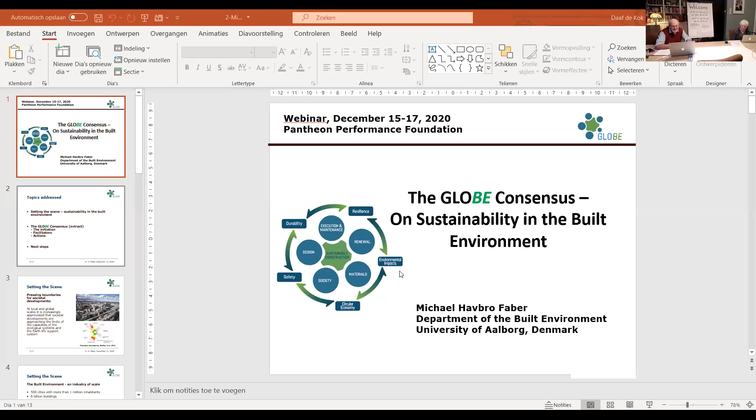Yes, thank you very much, Jacqueline. Sorry for not being able to find the link in due time, but here I am, ladies and gentlemen. I'm very happy to have a little time here to present the globe consensus on sustainability in the built environment.

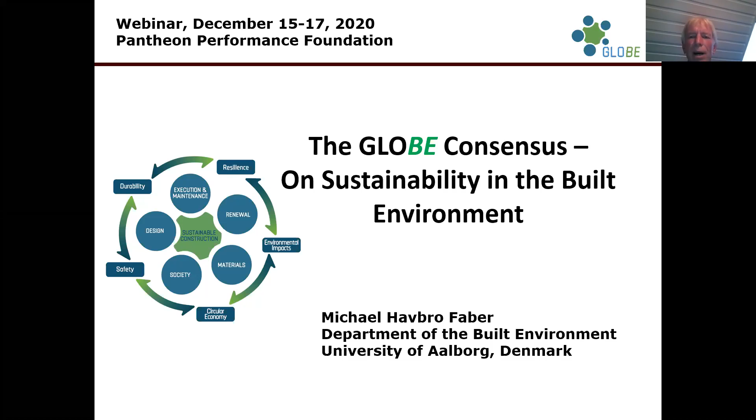So I only have a few minutes, so I will set the scene very briefly. You all know it basically, but then I will describe how the globe consensus initiated, and more or less, but not in great detail, what it contains, but also point at possibilities, things we can go after jointly, and I will point to next steps.

As you all are very well aware, but I think people outside our spheres may not be so clear about, is that the built environment actually poses a very significant challenge with respect to sustainable development. And of course, as professionals in this domain, we need to make sure we take the right actions.

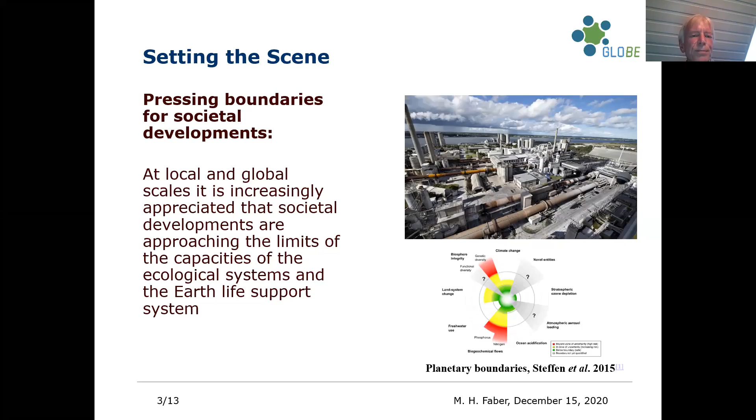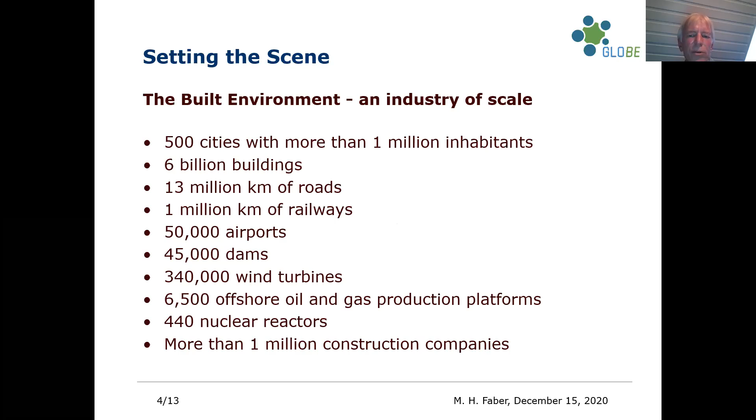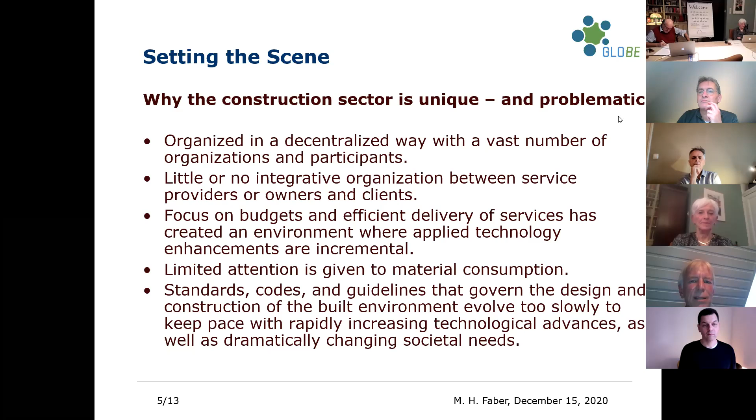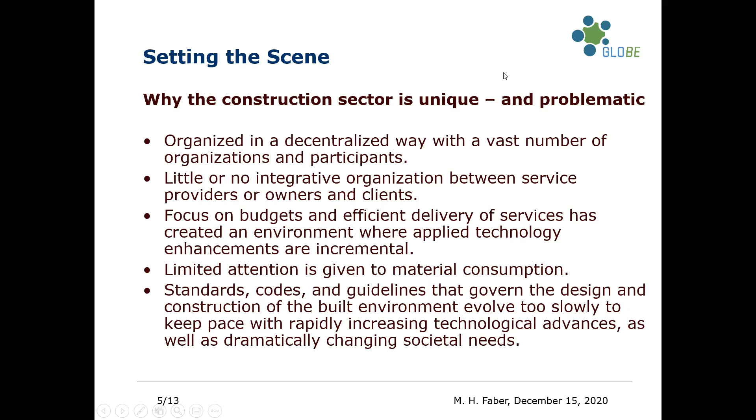Because the construction sector, with all these actors - more than 1 million contractors alone - is problematic. And it's problematic because it's organized in a decentralized manner. There are no integrative organizations between service providers, owners, and clients. And as we all know, there has been a long time focus on budgets and efficiency rather than real quality the way we understand it. There has also been very limited attention to use of material. And as we all know, standard codes and guidelines are moving slow relative to the rapidly increasing technological advances.

One very bold statement: if we were to be stuck with present best practice technology, the way we have been doing things up till now, then sustainable development would actually necessitate that we really consider building as little as possible.

And that was the starting point for a workshop we had at Tongji University in 2019 between the Joint Committee on Structural Safety and the International Joint Research Center for Engineering Reliability and Stochastic Mechanics. At that event, we developed a consensus document relating to sustainability in the built environment.

This consensus document was brought back to the liaison committee, which organizes joint matters of interest between RILEM, IABSE, FIB, CIB, ECCS, and IASS. The joint committee was given the mandate to try to establish a consensus between these associations, and for that purpose, a special task force was established, and a number of meetings were held. In 2020, in the summer, the consensus was reached, and by October the GLOBE consensus, as it is now called, emerged and was released.

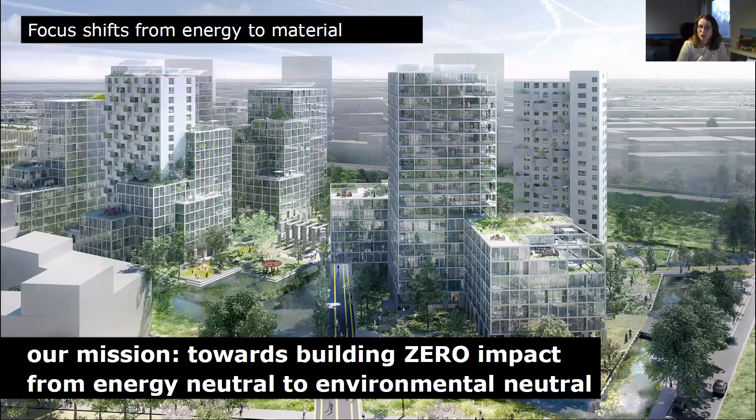What we see in our projects is a shifted focus from energy to materials. If we want to build buildings with zero impact, this is very important. We need not only our buildings to be energy neutral, but also environmental neutral.

And the structure is very important in this, because the material use of the structure is about 50 to 60% of the material use in all buildings. So you can see that the influence of a structural engineer is quite big in this.

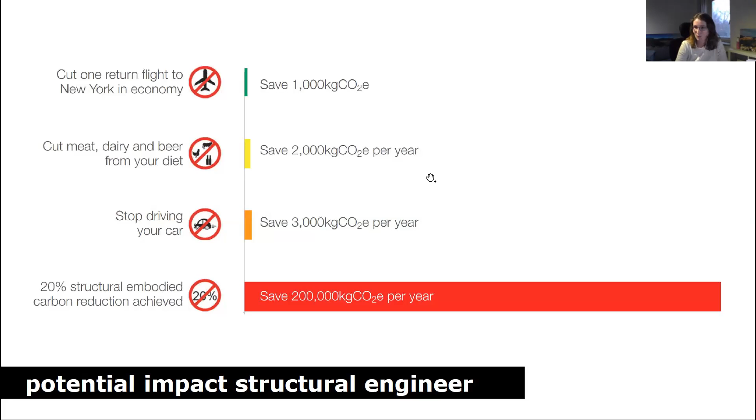If all structural engineers would reduce their carbon footprint in their structures by 20%, you can see what a big influence that would be. If compared to stop driving their car or cut meat from the diet, it has a much bigger impact.

I want to focus now on what we can do to reduce. Like Jacqueline told about the R ladder, if we look at the reduce of materials, the type of materials, we can reduce our carbon footprint or environmental price. And it's important to monitor and control all materials we use during the design process.

We can do this by design optimization. This is an example with a windmill foundation in which we did advanced calculations. There we were able to not only reduce the size of the foundation element, but also reinforcement needed in the element. And this made a reduction of carbon footprint of more than 30%.

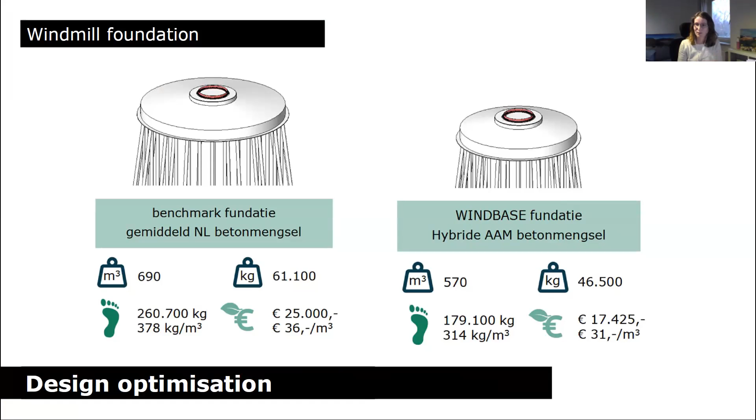So first we did the calculations to reduce the carbon footprint, but then we also looked at the concrete mixture. I'll talk a little bit more about that later.

Another project in which we did design optimization is the National Military Museum, in which we were able to reduce the steel structure of the roof by 40%. And we also had to use advanced calculations for this, because there were a lot of design stages, a lot of different calculations that had to be done, so it couldn't be done by hand. And also by optimizing this, we could really optimize the steel structure, so also having a huge impact on the environmental impact of this project.

What we also do is we try to look at our projects live. What's the environmental impact? So we developed a plugin for our 3D models with the environmental database to live see in our models what is the environmental impact. And by doing this, we can use this in the design stage to make decisions.

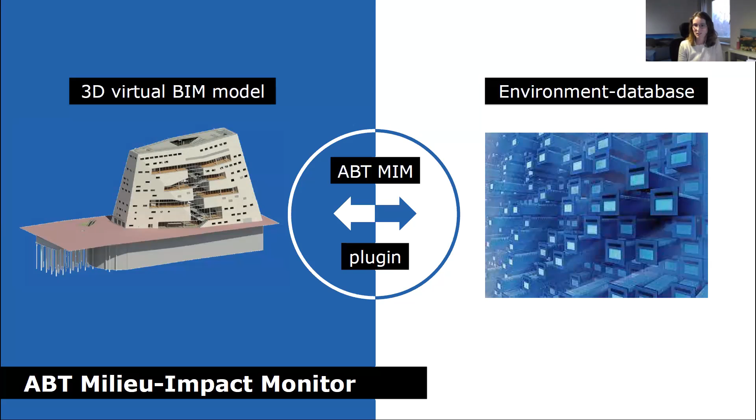We made a study of columns, for instance. We looked at a lot of different columns with the same principles, and then looked at which columns have the least environmental impact. What you see for concrete columns is the optimum between the concrete strength, the reinforcement you use, and the size of the column. So it's really important to look at all these things when you try to minimize your environmental impact.

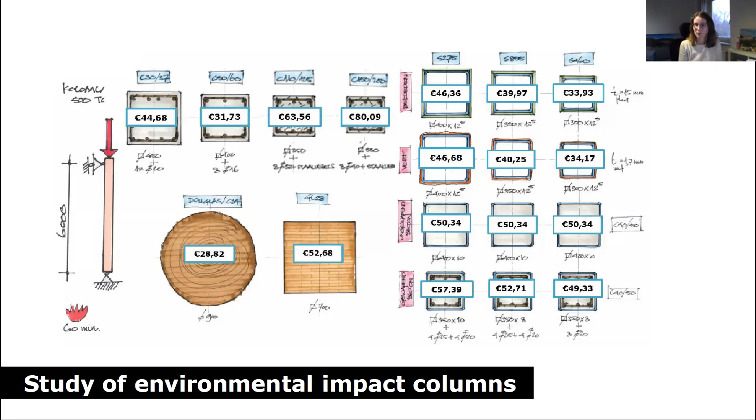Next, please. We not only look at elements, we also look at whole buildings. This is an example of a new residential building in Amsterdam. Here we looked at the carbon footprint of the concrete mixture.

So we prescribed a green concrete mixture, and by doing this we could reduce about 1 million kilograms of CO2. You can compare this to driving around the world about 150 times by car. So you can see, only in this building, by prescribing a green concrete mixture, what you already can do, what you can gain.

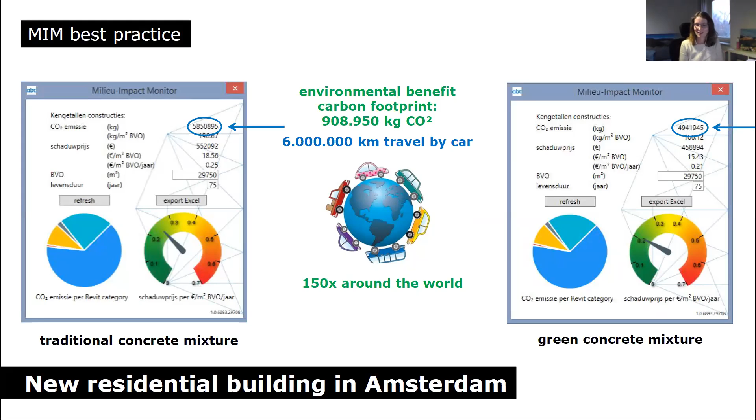If you look at these concrete mixtures, it's very important that you collaborate, because not only the structural engineer can do this - you have to discuss it with the contractor, with the concrete technologist, and come to a design that is optimum. Because if you choose a green concrete mixture, the starting strength can be different, can be lower. So you have to take this into account in the design stage.

I've given you some examples of what you can do in the design stage. I hope you're a bit inspired to really start with this at the beginning of the design stage, because there are a lot of possibilities. There's a lot to gain. Thank you for your attention.

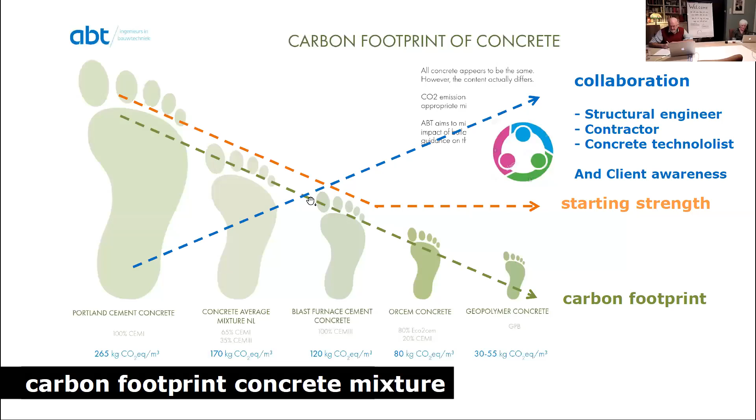Probably - Evelien, I don't know if Evelien is still there. Yeah, sorry, no, but Kathleen. Yeah, that's because I thought the question wasn't for me. No, okay, no, sorry, then I continue and go to Thomas Romm.

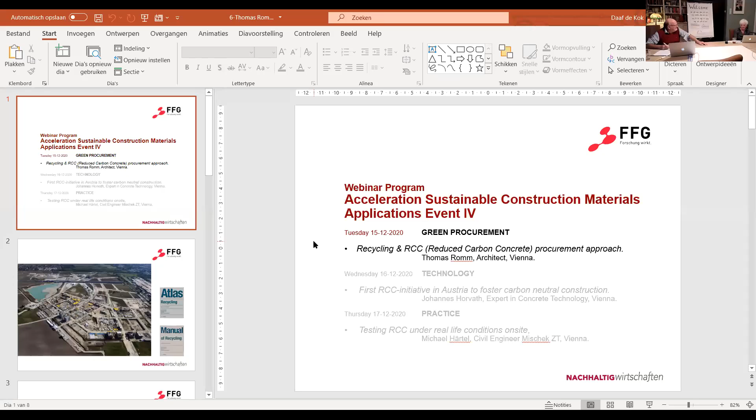He is an architect living in Vienna, and I'm curious to know what he's going to tell about recycling and reduced carbon concrete procurement approaches. The floor is yours.

Hello, everybody. Thank you for the invitation. Our presentation will continue tomorrow and the day after. We are a small consortium and we're going to present our research on reduced carbon concrete. But first, I'd like to talk a little bit about our procurement approach.

Next slide, please. Our architectural practice in Vienna has strong expertise in the environmental impact of construction, and for about 15 years now we have been consulting for ÖkoKauf, Eco Buy Vienna, the green procurement program of the city of Vienna.

In 2005, the city council started a 3-year research project on construction logistics, and that led us to design resource strategies for the fast growth of Vienna. This culminated in 2015.

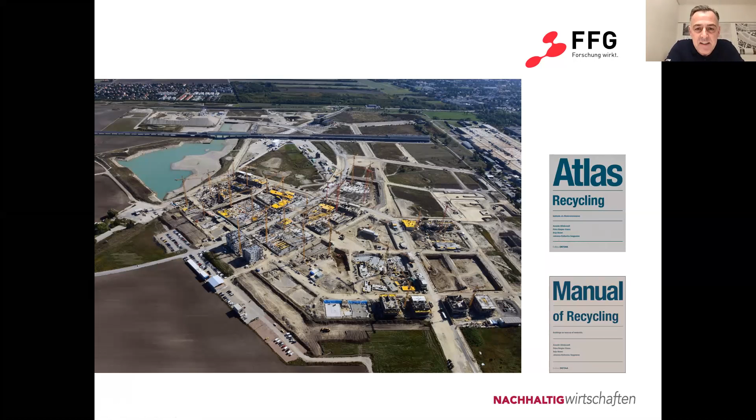This is what you see here on the image, when we were coordinating the initial phase of the Seestadt Aspern, a major city development area for 20,000 people, 20,000 inhabitants and 20,000 workplaces. So our work has been published, even in English, as you see, in the Manual of Recycling last year in 2019.

Next slide, please. Our strategy was a double input approach. First, we reduced the masses by optimizing a mass balance - by simply lifting up the street levels and using local material in order to reduce excavation. So this was the urbanistic approach.

But then in the first construction phase, which you see here on the left, of 3,000 housing units, we used, or reused, or recycled - you name it - 1.5 million tons of local material to build these first 3,000 housing units, just by procuring the logistics of it, for a bunch of 20 developers and 25 plots of construction, with a mobile concrete unit processing these local materials, coming on one hand from the little lake here, and on the other hand from the excavation material of the housing.

One more word: the result was that we could, in fact, have 100% locally produced concrete on site, with a double unit with a maximum capacity of 200 cubic meters per hour. This was the largest ever seen in Austria.

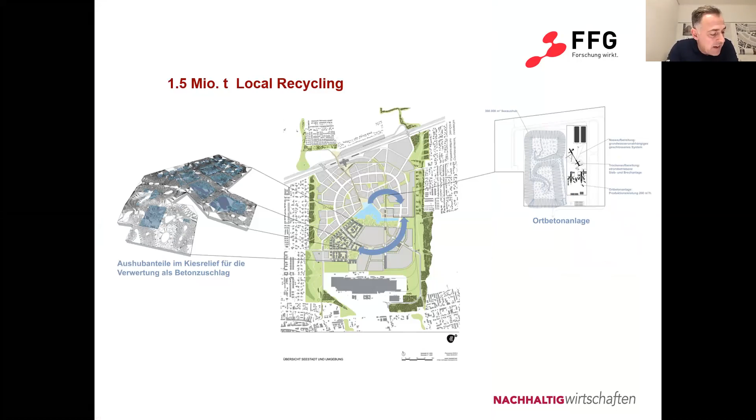And finally - next slide, please - we were asked in the following years to scale this down to single housing projects like high-rises, and worked this out. So it came to the point that we had an engagement for Nordbahnhof, which you see here on the right hand - another 3,000 housing units are going to be built between 2020 and 2022. In that case, we were asked from... can you see my cursor here?

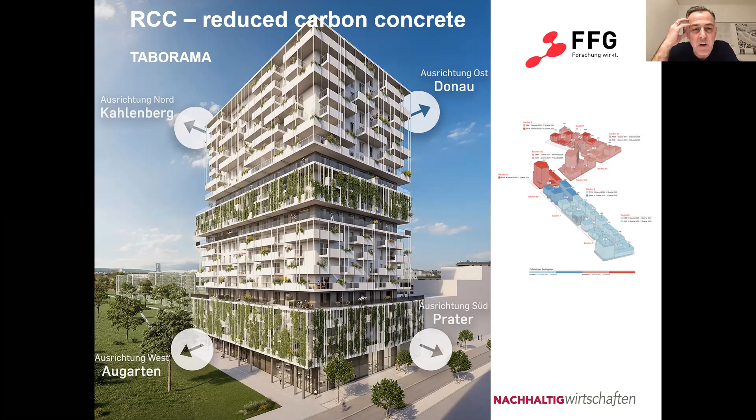This special high-rise is part of the whole development area, to have a look on reduced carbon concrete for Strabag, for this Strabag building. Strabag Real Estate asked us what we have learned from ICLEI and the Big Buyers initiative, as European context is approaching and proceeding in the question of reducing carbon in concrete. So we had a research program ongoing, starting in March this year.

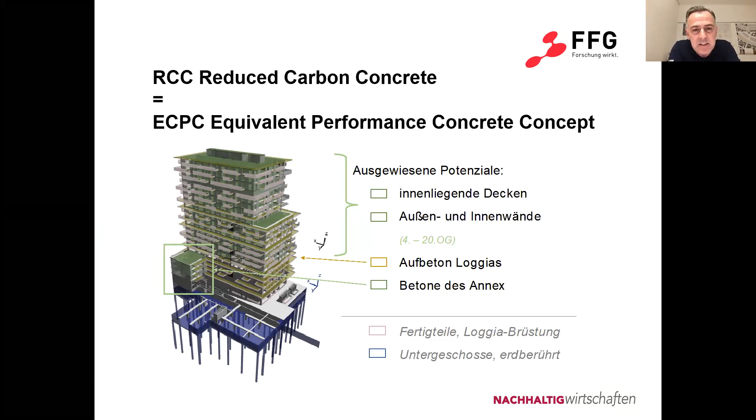We had a look at this special high-rise being part of this housing structure, and we looked at the elements in the BIM model. We identified possible elements to reduce carbon in concrete with the equivalent performance concrete concept, which I first learned from Boudewijn when I met him in Nijmegen at EcoProcura.

The result of this ongoing experience is our summer series on the construction site, where we are testing and doing a risk assessment and cost assessment of clinker-reduced concrete. So we have these usual fillers, such as blast furnace slag and fly ashes, to reduce the clinker content and therefore reduce carbon.

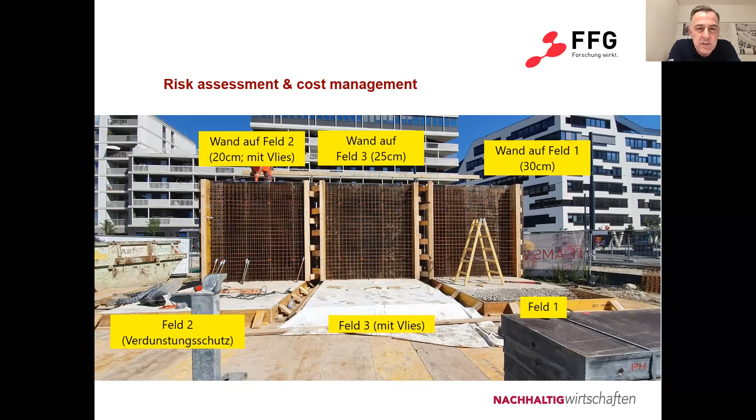These RCC concretes are very sensitive to low temperature, and this is why we have to continue these experiments now in wintertime, to compare and see if these results can be achieved within the existing standards.

This is the second experiment we are actually doing right now at Mischek Systembau, a prefabrication plant near Vienna. The conventional recipe, shown on the left, uses about 250 kilograms of clinker. Our recipe now, which is still not the final version, uses about 180 kilograms of clinker. So you can reduce 46 kilograms per cubic meter of concrete.

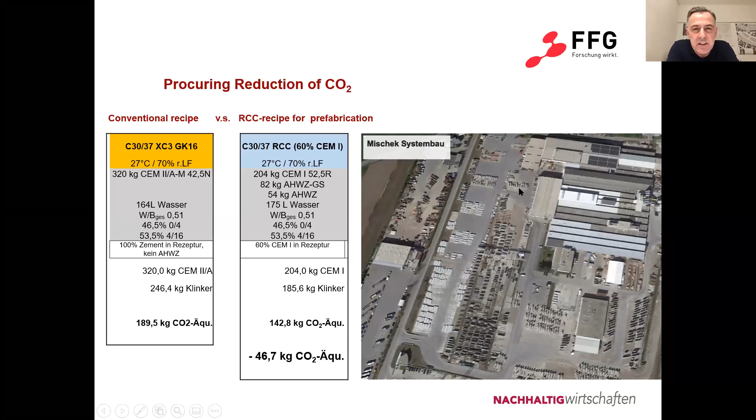So we are now procuring with EPDs, planning to compare these recipes with the conventional LCA EPD existing for any kind of concrete. Here, for an exposure class of C30/37, a conventional concrete produces 236 kilograms of CO2 per cubic meter in the production phase, phase A. With our reduction, within the normative approach of the equivalent concrete concept, we can reduce at least 20% for this case.

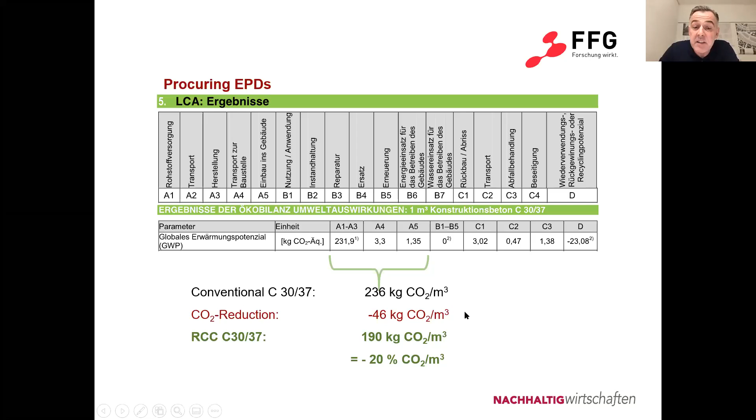Thank you. Wonderful to hear, Thomas.

We really like to share your experiences in putting all our innovations into practice in the Netherlands, because there are many similarities in the kind of activities that you are carrying out and that we are planning or already carrying out as well. So thank you so much.

I'll come back to you later, but I first want to give the floor to Martijn van Leeuwen of NIBE, who will talk about environmental shadow cost indicator tools for setting contracts.

Welcome, Martijn. Yeah, thank you, Jacqueline. Thank you, Boudewijn. Thank you for the opportunity to present some of our work that we've done in the Netherlands in the last 10 years.

I've made a very brief presentation for you. And I see my screen—you see it as well, I think. So, next slide please: the Netherlands.

There is something notable about our country: because of the significant industry we have and the limited area we have, living in a delta close to the North Sea with main rivers flowing through us, and having a big agricultural and chemical industry, we experience one of the strongest man-made pressures on the natural environment in the world. This has made our country very conscious of this issue. We are very aware that we have an influence on our national environment, and we have all kinds of policies and measures in place, including a focus on environmental performance for many years, and green public procurement based on LCA data for at least 10 years.

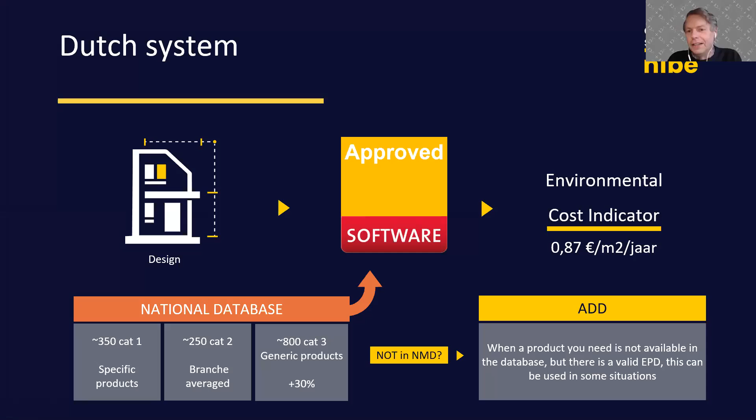So, next slide, the system. So we have a national method for LCA for constructions, and it is based on the European norm. We express it as a single point to get a total environmental cost indicator in euros.

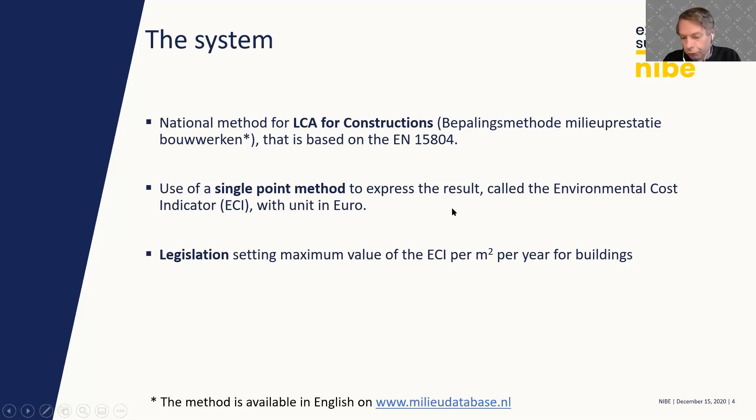And we have done 2 things. First, we have set legislation setting a maximum value of this environmental cost indicator per square meter per year for all types of buildings, mainly residential and office buildings at the moment, but the others will follow shortly, I think. So you will not get a permit if you are over this value. This is an important mechanism in our market, so that you need to show and prove that you build and construct under this value.

And we have done another thing: we use this environmental cost indicator in green public procurement as a criterion in the following way, so that we offer the contract to whoever has the lowest sum of price plus X times the environmental cost indicator. So if your price plus X times the environmental cost indicator for everything offered in the contract is the lowest, you win the contract. It could very well be that your price may not be the lowest, but your environmental cost performance is the lowest, and that gives you, in the end, the contract.

X is set by the nature of the contract, by the specifier, and it can be anything between 1 and 10. I've seen up to 10, I've seen 1 also. Typically for concrete contracts for Rijkswaterstaat, we are around 4. So 4 times the environmental cost plus the price is the award-winning criterion for the contract.

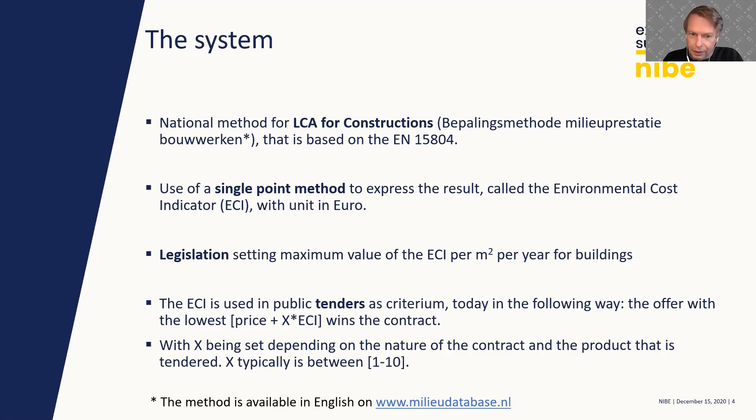Next slide. So I make a few personal observations. In the sectors where the legal maximum values are used, so only the legal contracts, the legal maximum of 1 euro per square meter per year, we follow this closely. In my company, we follow this every year, and we do about 4,000 LCAs per year. So we keep track of the performance of the industry. We see little or no improvement.

So apparently, this maximum value and this legislation has no impact on the way we build, and we don't build any more green or sustainable than we did before.

In those areas where the formula I showed you is used in tendering, giving a benefit for winning the contract, we see overall improvements of at least 10%, and up to 40% in certain sectors. A 40% improvement in 5 years is enormous.

So there's a big movement where these contracts are used, and we also see an upward price effect. It's hard to be precise because there are normal price fluctuations and economic up and downturns, but we estimate an overall upward price effect on purchased goods of between 0 and 5%.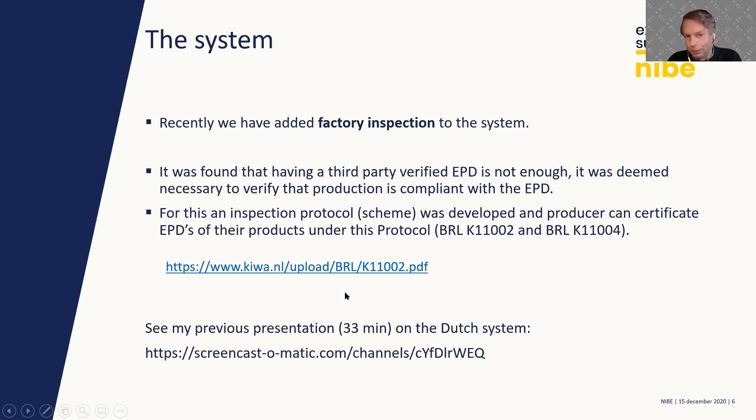This is really necessary, because otherwise we feel there will be too much deviation and the system won't be reliable. There is a presentation broadcasted, 30 minutes in English, where the whole system is explained by myself. You can look it back, and the inspection protocol can be downloaded from the link in this slide.

Thank you so much, Montaigne.

This whole idea of using the environmental cost indicator is also quite a crucial aspect of the concrete agreement in the Netherlands, and is also used, I ask Jack to reply, in the contracting procedures being developed among the commissioning parties. Can you respond to that, Jack?

Well, that's actually precisely what we do. According to the principles I presented earlier, together with all the public clients, we discussed the way we use this indicator, and we agreed that we should sharpen this criteria over time. Given that we do this all together, we actually stand for quite a large volume of concrete procurement in the Netherlands, and this really has an effect.

We also discuss regularly with contractors and suppliers if we are doing this in the right way. One of the first things we got back from them is that we were not consequent in using this indicator. At first I thought they meant we were doing it differently, but they were actually talking about the first step, that we were not all doing so.

Next. They pay for it, so they should decide how it goes. It's very simple. Next - yeah, next is my name. Okay, here are some key facts.

It's one third of construction that is taxpayers. We have an increasing demand on infrastructure because of climate adaptation, so there will be more and more infrastructure problems to be solved. We have, and those are all, of course, public.

The sustainable structures are at lower cost if you really do it the way ABT and other structural engineers look at it. This is an interesting comparison from Professor De Sitter: if you invest €1 upfront, you will save 125 if you have to replace it. It's as simple as that. So now the question is, of course, who is interested in replacing it? That is the key, that is a problem.

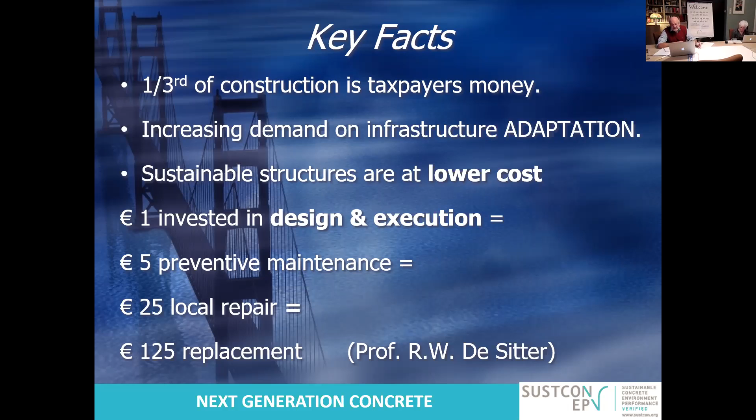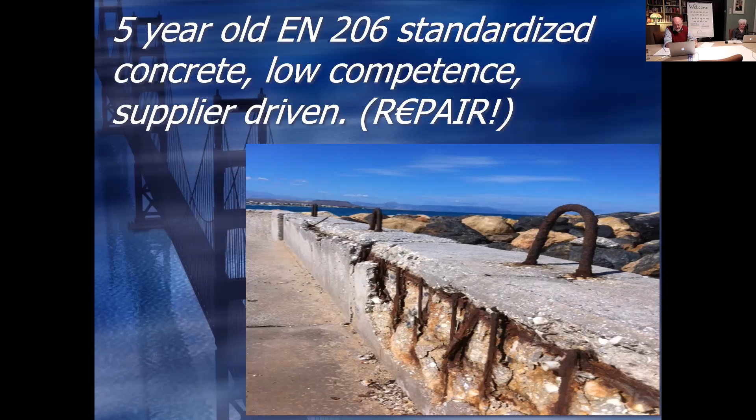Next, please. Now, this is 5-year-old EN206 standardized concrete - low competence, supplier driven. Okay, repair is a way of making money. Next, please - this is almost 2,000 years old, no standards, but very, very well designed from a material point of view.

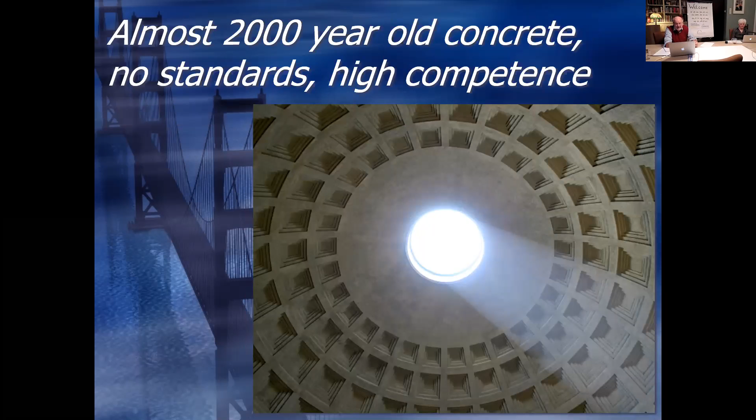Next, please. The problem is, of course, that not all cities are like The Hague, where you have specialized people who understand the technicalities. You have smaller villages, and they need a hand, so they should rely on material-neutral designers, the structural engineers and architects in a certain way. But they expect the suppliers also to know what has been delivered. The question now is, are both parties well informed?

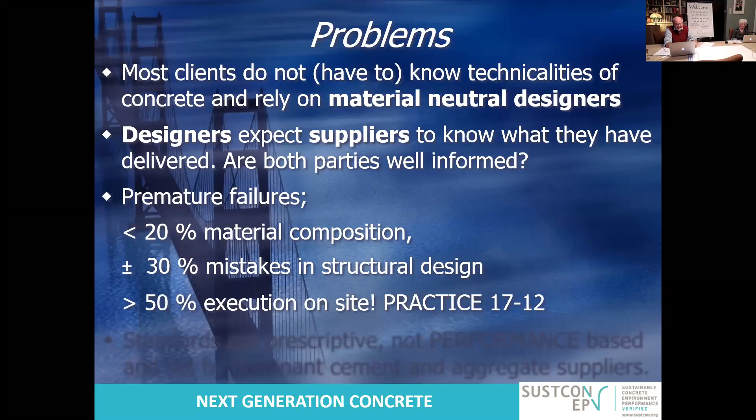If you look at premature failures, less than 20% is material composition, 30% mistakes are in structural design, and more than 50% is execution on site. We'll talk about that in practice on Thursday, because it's a key aspect. But the material composition and structural design should be in the hands of the structural engineer. The standards are prescriptive, not performance-based, and set by dominant cement and aggregate suppliers.

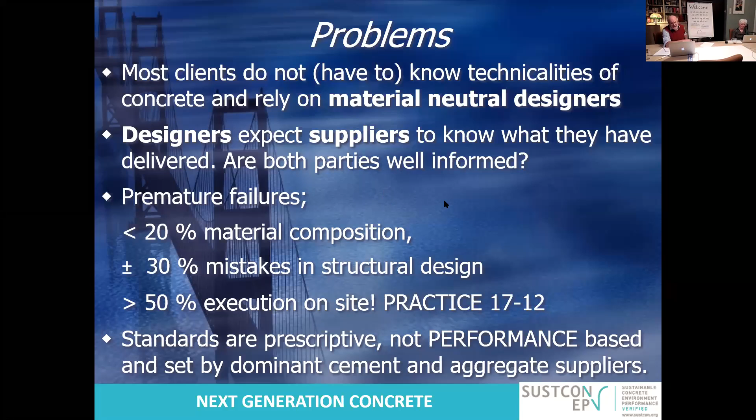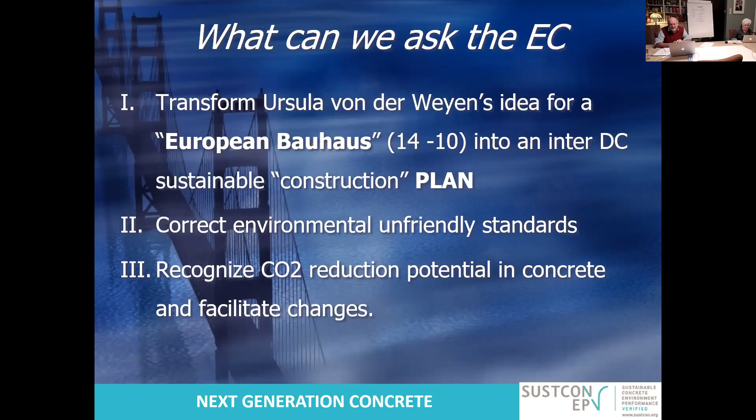You have the lobby group, you have the sponsoring, and even universities - I know one particular country where 9 out of 10 universities don't dare to do anything because they get sponsored by the cement lobby. I don't blame the cement lobby - I probably would have done the same if I were in their place. But we cannot go on like this.

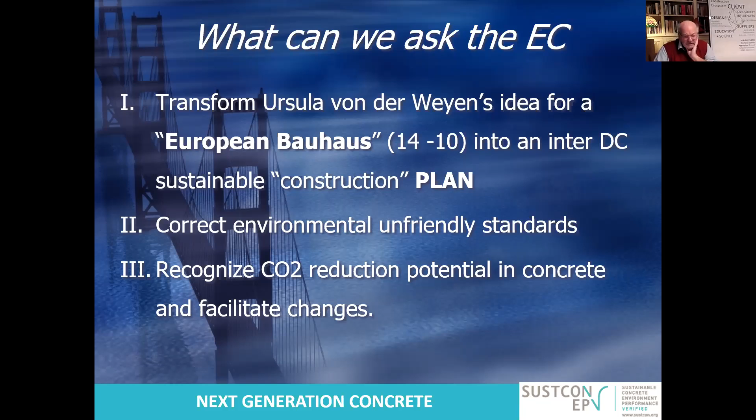So next, I think, okay. Oh yeah, I'd like you also to talk about the Bouw Circulair of Dave de Kok, who's our hosting, by the way, this session. But I'd like to see the other one first.

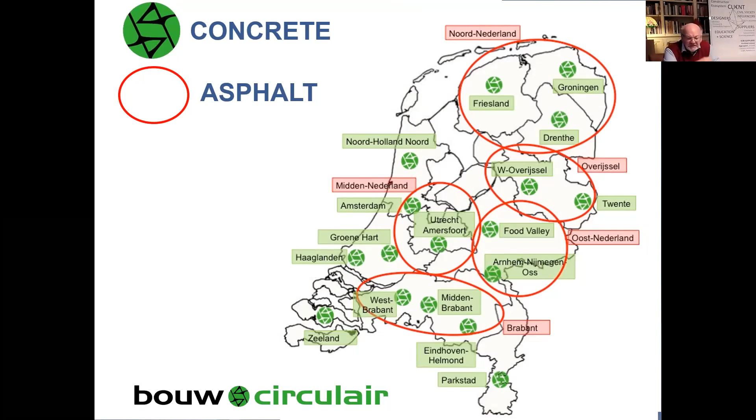Yes, okay. They started with concrete groups, very local, and then more regional, about recycling concrete. It might not be on the ladder Jacqueline mentioned, it's place number 9, but it's an easy one to get into it. People really say, okay, if you recycle concrete, that is the best thing to do. Well, in Vienna it was, and in another place it's not. So you really have to look at it from the situation, but it is the best way of getting this done. The next one, please.

The other one. Yes, this I just saw this morning, so I didn't train myself on looking at it, but it's a whole, let's say, ecosystem of getting things done. And I think I will leave it like that for the moment.

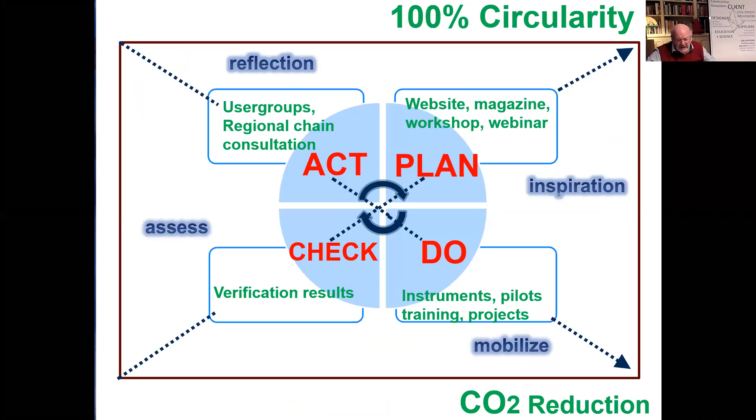We'll come back on this, by the way, on Thursday, about the ecosystem, I think, which would be the solution to the strange problem we have that in a healthy market, there is only one party that says what quality is, and that's the client, the customer, and not the supplier, and certainly not the supplier of the supplier. But that happened to be the case, and that's the way it worked out. I'm not blaming for taking advantage of the situation, but it's not good for us.

Now, please, I'd like to open the floor to whoever feels like posing questions. Please go ahead. Do you like the people to respond to the question about the role of the European Commission, or do you want to broaden the discussion? So let's first see whether there are still questions or remarks to be made in general.

Thank you for your presence here and your kind way of listening to what we have presented. Thank you so much. Thank you too. Thank you, Kola. Thank you everybody. I see on the screen many of them I know, but new people are just as welcome. Thank you.